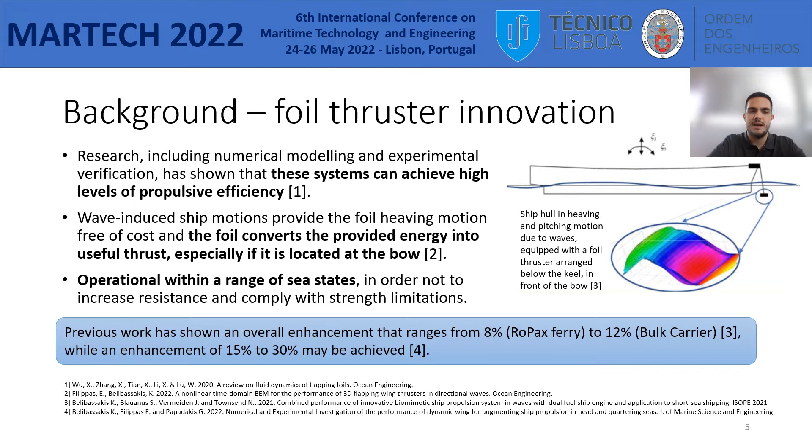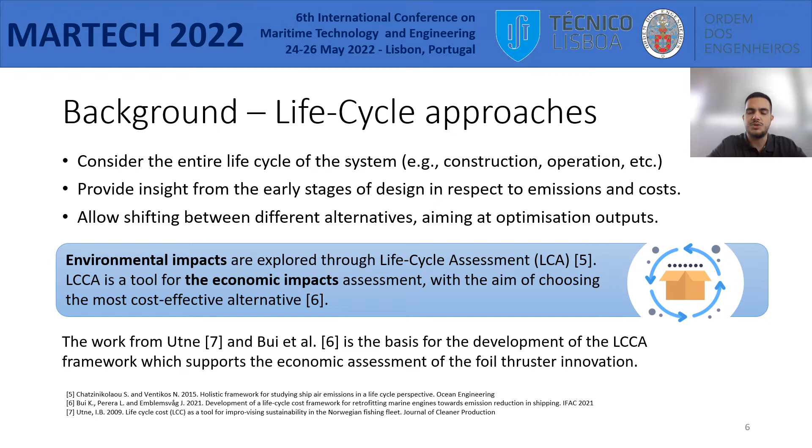On the other hand, life cycle approaches are very important as they provide a significant insight even from the early stages of design. They include all necessary life cycle phases, which can be adapted in respect to the system under consideration. Most importantly, though, they allow shifting between different configurations and alternatives in order to choose the most cost-effective solution. As life cycle approaches, life cycle assessment is used for environmental assessment, while life cycle cost analysis is used for the economic assessment, which is the case in the present paper.

In terms of methodology, for appreciating the combined performance of the foil thruster, in combination of course with the standard marine propulsion system, the presented data were utilized. In more detail, after assuming a reference point in the North Sea, which is characterized by dense marine traffic, wave data were generated for a large population from the bivariate probability density function model.

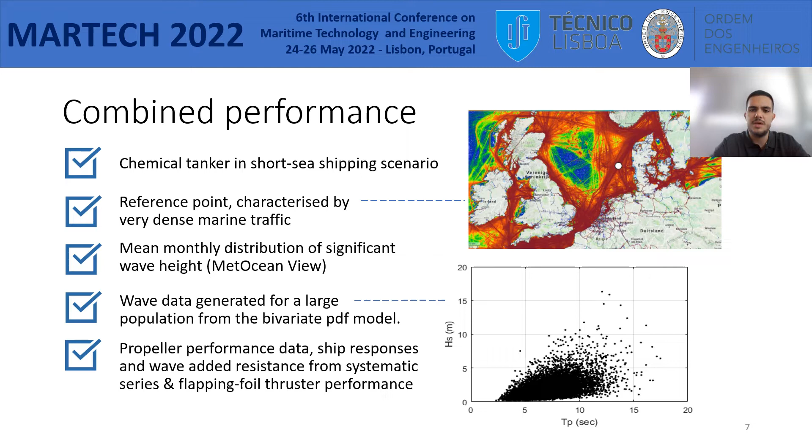These data are systematically used in conjunction with propeller performance data, ship responses, as well as wave added resistance from systematic series, and finally, flapping foil thruster performance data, in order to calculate with all of these the ship engine performance in head waves with and without the flapping foil thruster for the whole population of waypoints.

The methodological approach for the introduced LCCA framework includes the steps that are shown here. First comes the problem definition, which is defining all costs for the economic evaluation of the foil thruster installation. Then, the breakdown analysis identifies all cost elements. The first distinction, of course, of cost elements are the 4 life cycle phases that I will show you in the next slide. Then comes the analysis in smaller costs, such as individual cost of parts and components in construction phase or consumptions in the operation phase.

Cost modeling is the way of approximating the cost. 3 models are mostly used: the analogy, parametric, and engineering. The analogy model utilizes data from similar systems. Parametric model scales up and down the respective costs in order to approximate the cost of interest, and the engineering model is a detailed and reliable way of mathematically calculating the costs. Afterwards, all available data are collected and the costs are calculated in their present value in order to finally evaluate an investment regarding the foil thruster.

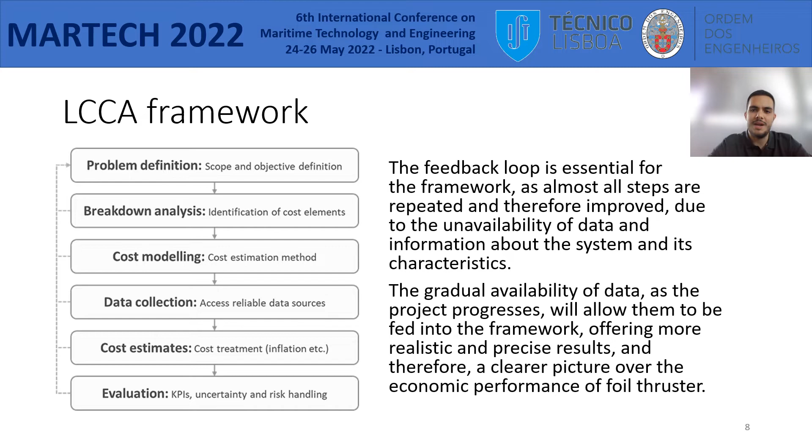The feedback loop that is illustrated here is very important, as it stands for the iterative process of the LCCA framework. According to this process, all steps should be repeated and improved due to the unavailability of data in the early stages of the product development. The gradual availability will allow more realistic and precise results.

The 4 phases of the LCCA framework are described and illustrated here: construction, including retrofitting costs; operation, which mainly refers to fuel consumption; maintenance, either on board or dry dock; and disposal. The figure shows the breakdown of the most cost elements that are already identified.

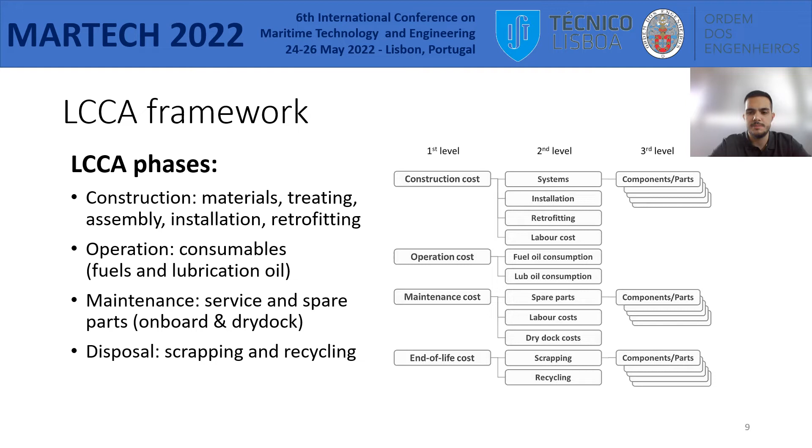Here are the combined performance results generated from the data presented earlier. For the service speed of 15.2 knots for the given location in the North Sea, the expected improvement by the operation of the foil is illustrated in this figure. The black solid line indicates the increase of calculated power in kilowatts due to waves, and the red solid line the expected improvement due to the operation of the foil thruster in waves. The red dashed line indicates the mean expected enhancement compared with the black dashed line. As a first estimation at the ship's service speed, the overall expected performance enhancement ranges from 2 to 7%.

In addition, this figure shows us the limits of the operation of the foil. On the one hand, in sea states with low significant wave heights at approximately 2 meters, the foil may contribute to increased power demands, while on the other hand, the sea state with significant wave height of 5 meters is considered as an upper limit from the point of view of strength and safety requirements.

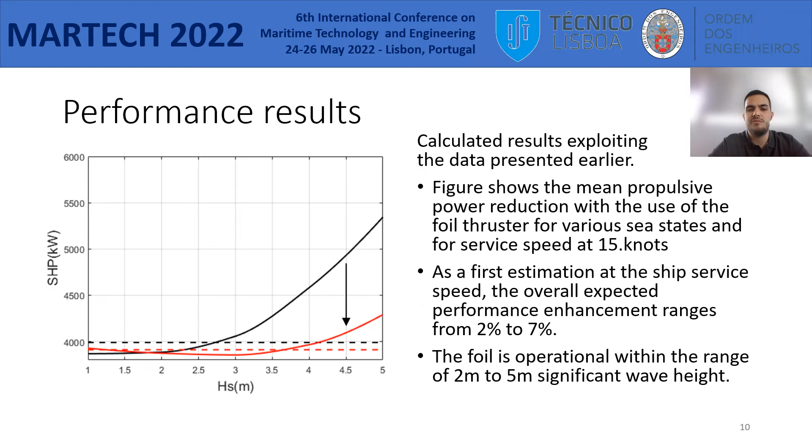The previous calculations are exploited to show the corresponding operation points of the engine propeller diagram. The operation points above the calm sea condition, the black dashed line, correspond to the increase of power due to the added wave resistance effect. On the other hand, the operation points of the propeller curve below the calm condition indicate the improvement of performance due to the operation of the dynamic flapping foil thruster.

These operation points would remain above the line of calm condition along the propeller curve if the dynamic thruster wasn't operational. The sea state with significant wave height of 5 meters is considered as an upper limit from the point of view of strength and safety as stated earlier, and thus results above that limit are excluded from the calculations that are considering the effect of the foil.

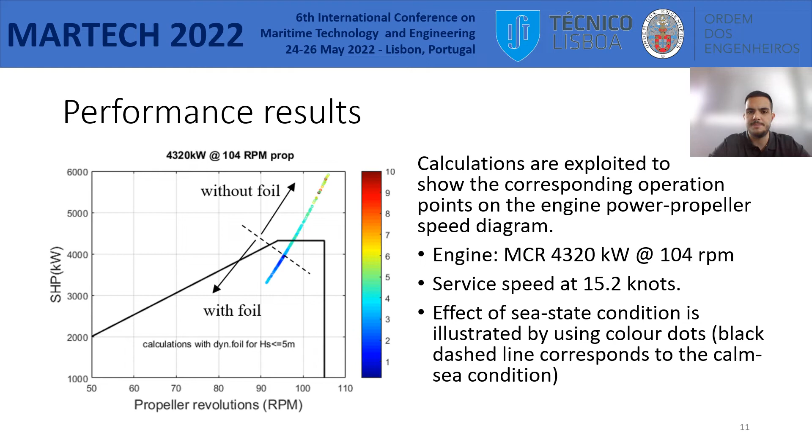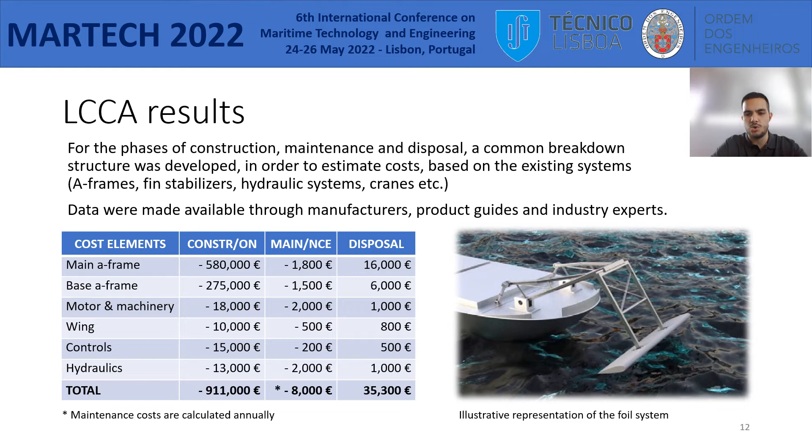Cost modeling follows the analogy and parametric models, as the engineering model is still under process in the context of SeaTech Project. Data were made available through manufacturers, product guides, and industry experts to approximate the costs. For the operation phase, in order to show the economic performance of the foil thruster, a comparative study between engine performance without the foil thruster and with the foil thruster is underway in the context of SeaTech Project.

As shown earlier, operation costs include mainly fuel and lubrication oil consumption. These are calculated through the presented equations. Power demand in kilowatts is extracted from the combined performance results that were presented earlier. The specific fuel and oil consumptions are given from the engine manufacturer as a function of the engine load for either ULSD or LNG as marine fuels.

For the operation time, 8,700 hours are assumed yearly, from which 7,400 are in seagoing operation. From these hours, based on the whole population of wave conditions presented earlier, the foil will be operational for approximately 28% of seagoing time, namely 2,080 hours. Thus, the respective power demand, either with or without the foil, is inserted into the calculations in order to estimate the fuel and oil consumptions. The prices for fuels and oil are then inserted into the calculations to provide the respective costs.

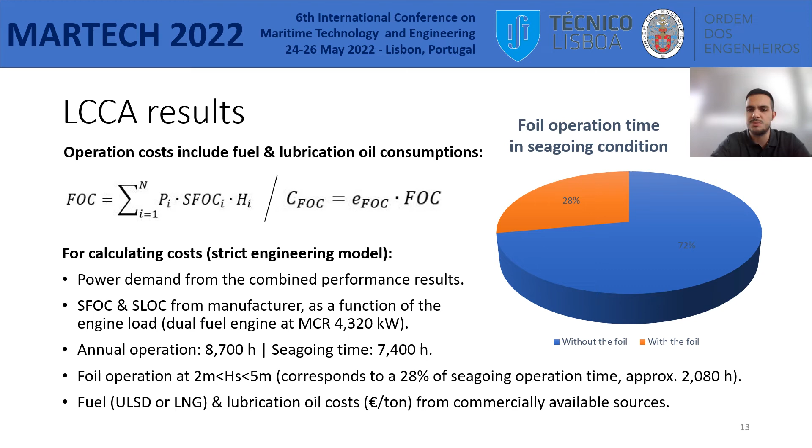Calculations are in progress within SeaTech Project, but are not yet mature enough to provide a safe conclusion for the range of the expected benefit from the foil operation. Experimental studies through sea trials of a large-scale model in the next months will provide us with more safe and reliable data.

In conclusion, taking into account that the present results of the combined performance contain an error associated with the cumulative inaccuracy of the application of systematic series data, they constitute first indications and trends of the performance of the foil thruster in combination with the ship engine propulsion system. It is shown that the use of flapping foils could augment the overall propulsive efficiency of ships and reduce engine load by extracting energy from waves, as well as simultaneously damping the oscillatory ship motions.

This effect is more significant in moderate to high sea conditions, while in calm or extreme weather conditions, a retraction mechanism for the dynamic foil system is required to avoid increased power demands or damage respectively. The concept shows significant prospect and is likely to be applicable to a wide range of ship types. On the other hand, the developed LCCA framework is a useful tool for the continuous economic evaluation of the foil thruster innovation by providing useful insight for decision making during its design and development. The first LCCA results, despite their low maturity, are encouraging since they show a significant economic benefit from the operation of the foil, which counterbalances the construction and maintenance costs.

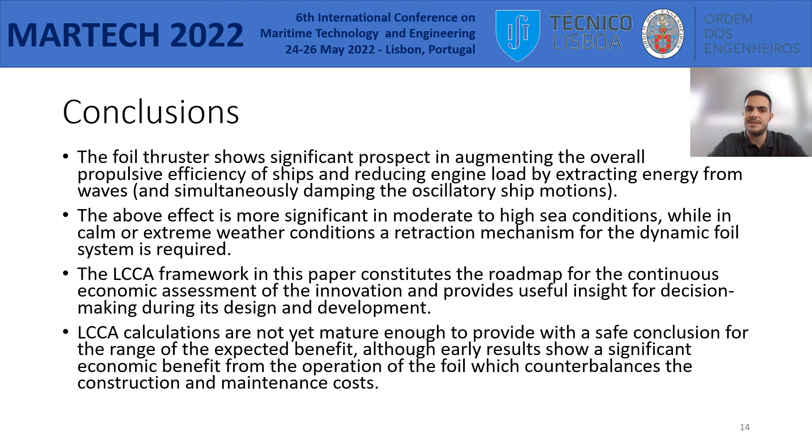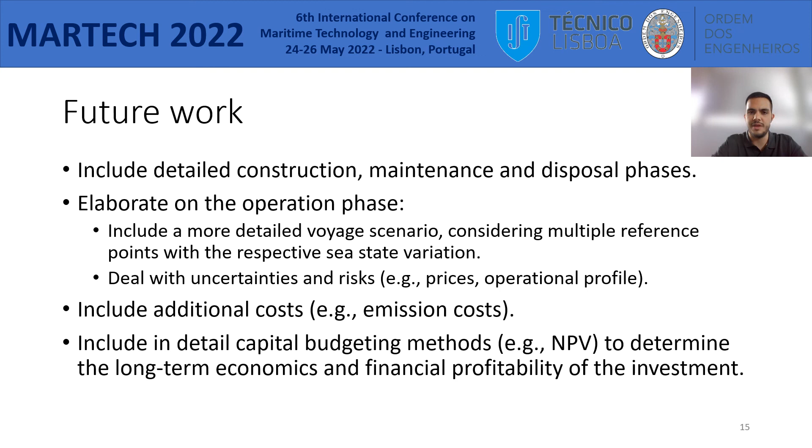Future work is necessary to thoroughly define the economic impacts and to deal with the uncertainty and risks that have impact on the flapping foil thruster's life cycle cost performance. This will include detailed construction, maintenance, and end-of-life phases when more information about the system structure will be available, a more detailed voyage scenario considering multiple reference points with the respective sea state variation, uncertainty analysis for the material and fuel prices, and capital budgeting methods such as net present value to determine the long-term economics and financial profitability of the investment. Thank you very much for your attention.